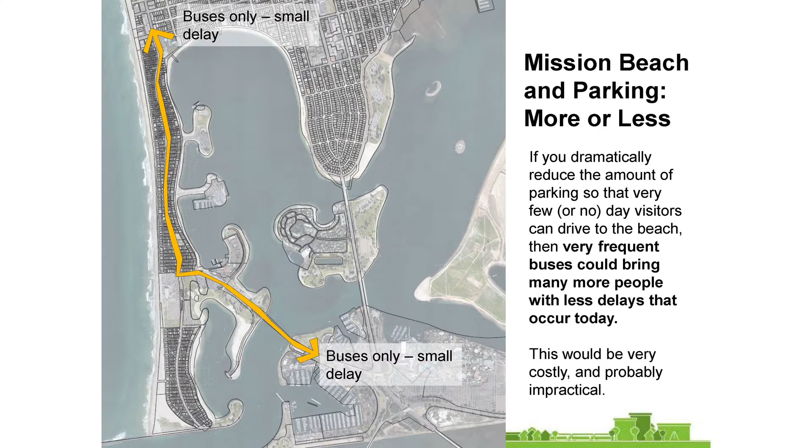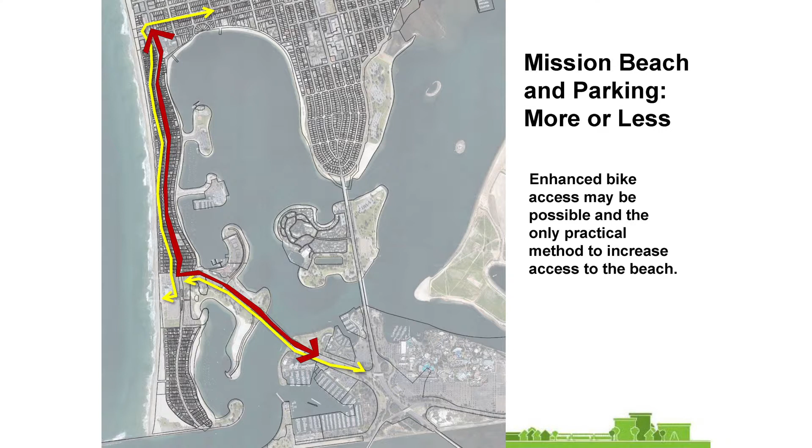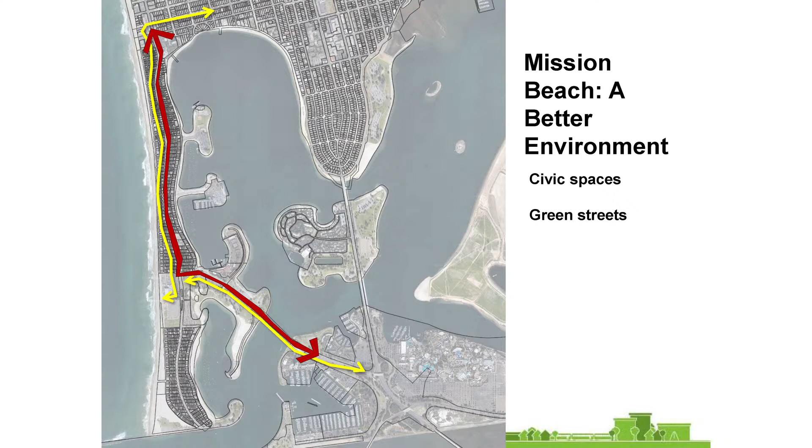So really, if you want more people in Mission Beach, it means squeezing more bicycles, pedestrians, and rollerbladers onto that beach. You've got one way in, one way out, and unless you radically widen or change it, it's not a transit place. It's very unusual to have a place like that, but that's what's been going on. So one thing we can talk about is having a better environment for the people who are there—not cramming more people on, not rearranging the parking, but having a better experience.

Now I'm going to talk about PB, and I have to say that until I came here, I thought PB was peanut butter. I'm never going to hear about a PB&J again without thinking of my visit with you all.

As we talk about PB, one interesting thing is that the relationship to the water is what's been driving so many people to come here ever since this place was created. Most of your street grid, the long blocks, are oriented towards the water. Down by the point, it actually turns, because that's where the water was—makes a lot of sense, since that's where the value is. If I were a real estate developer, I'd do it that way too.

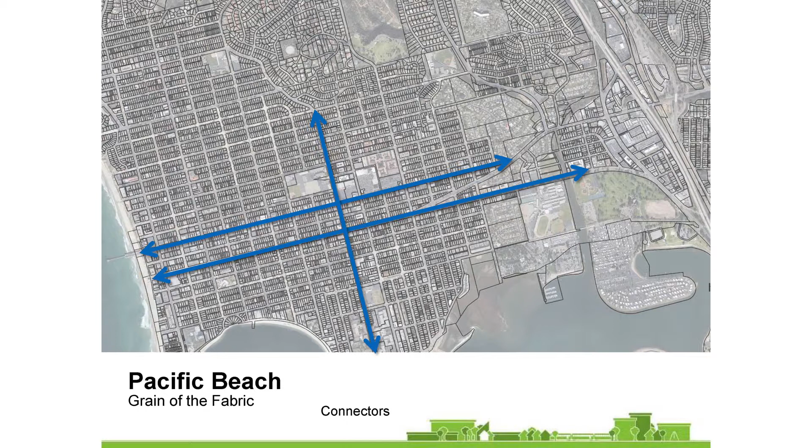Now, what's interesting is you've got to get to and from those blocks, so there's another fabric of streets that turn the other way. And then you've got the major feeder roads, whether that's Ingraham, Grand, or Garnet.

One of the things you've done is make those streets equivalent. Remember, we're talking about getting out of the cars, having a better quality of life in a pedestrian-oriented place. But the way you've treated your streets, north, south, east, and west, is almost the same, with stop signs and widths being the same.

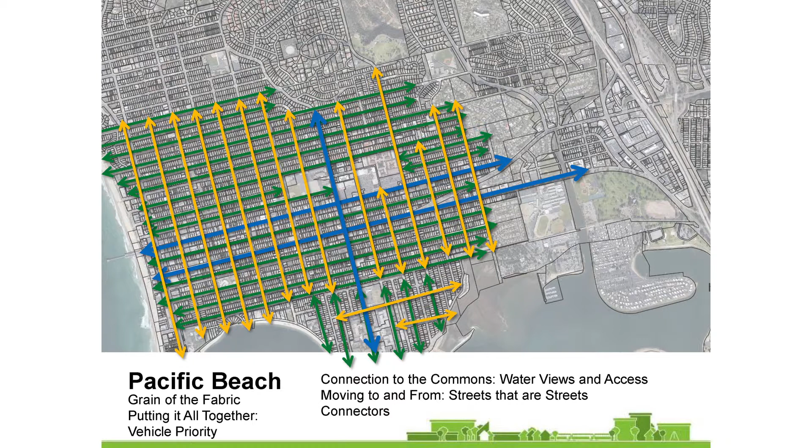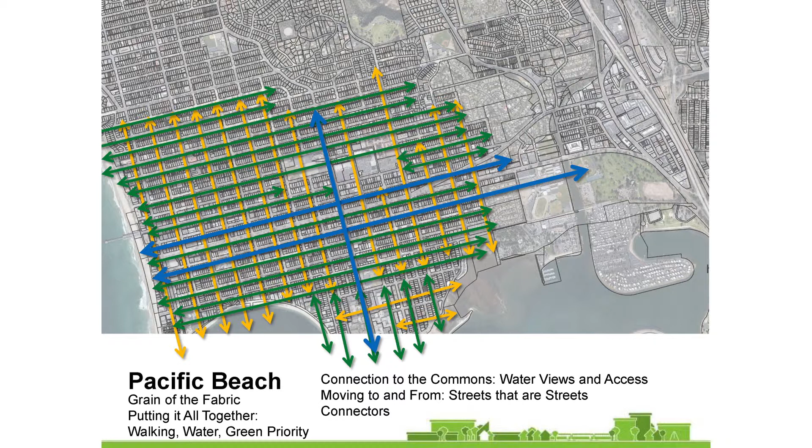You could think of it differently. You could say, let's make sure we can get to and from north-south, keep those roads clear, and put the stop signs the other direction. Or you could think of this as a place where you want to get to and from the water, giving priority to green routes and pedestrian connections.

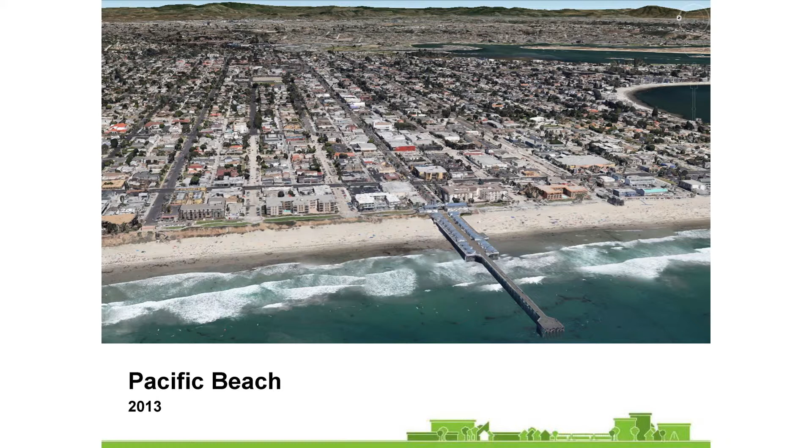As you look into the future, one opportunity you have is to think long-term, not just short-term. This place has changed fantastically every 50 years, and as we think about the future, it could and maybe will change, but you're in a position to manage that change.

As planners, we think a lot about walking and how far people will actually walk reasonably. It's about half a mile if you want to go to a restaurant, half a mile to an amenity like a beach, half a mile to walk to transit rather than taking your car.

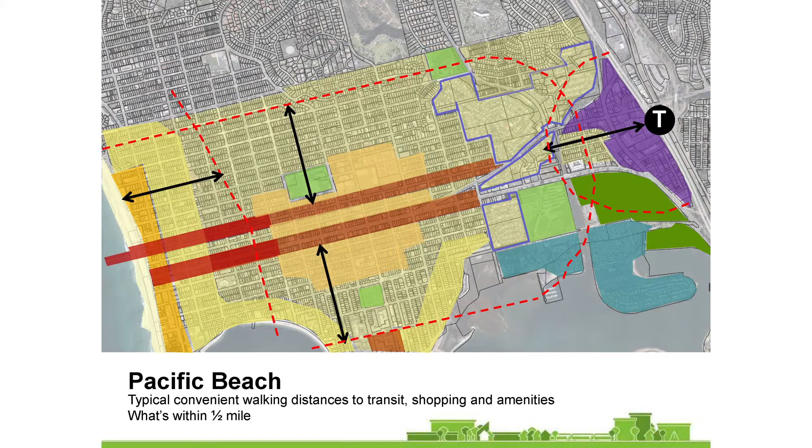So let's take that half-mile dimension and look at your community. The one line on the left is half a mile from the beach. A lot of this is away from the beach, but if you take half a mile from Grand and Garnet, that's almost the entire community. And if you add where transit's going to be and put a half mile there, you are an immensely walkable community - almost exactly the same size.

So how do we accomplish that? One thing we need to think about is the notion of where housing occurs and how it relates to those places. You've been changing from the bungalow world that was once here, when the real estate developers of 1914 and 1946 were thinking about the future. I don't think they envisioned quite the density of multifamily houses.

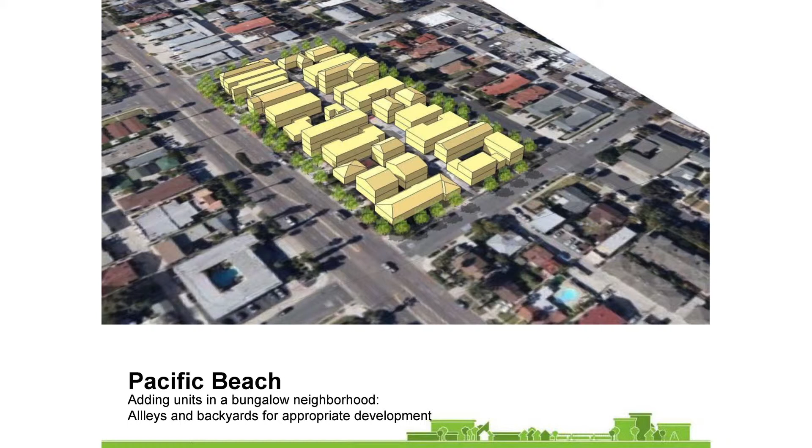If we look at how your blocks are organized in one of the more residential, single-family areas, you do have a mix of buildings quite close to one another that built up over time. One question you have to answer is how you want to work with zoning and the design standards or methods you could use about the future.

One thing you could think about is a pattern you already have - almost double units, where units are well-shaped but set back in the backyards. The backyards have been available, and with units along the alleyways, you can end up with a scale and character that is actually quite pleasant.

But another way to do it is to have really responsible, careful design multifamily buildings with courts and open spaces the community can enjoy as they walk by, bringing some of that landscaping and open space. So we think you have some important choices as things change and grow. Along the commercial areas, as Ed has pointed out, the amount of commercial use is actually not so strong, and you really do have some interesting choices.

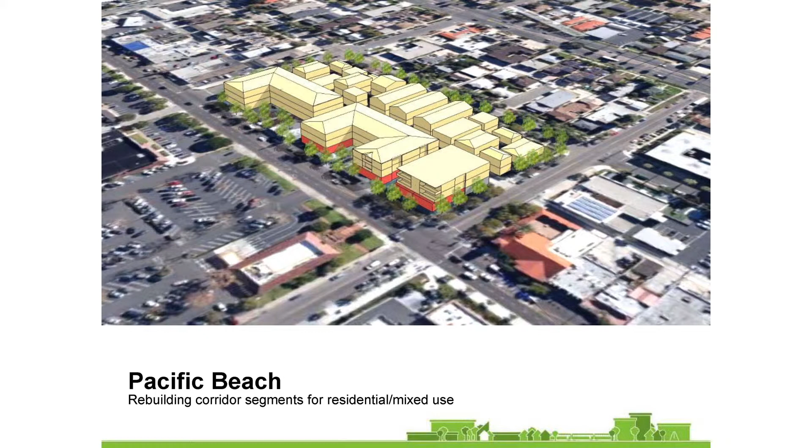One of the choices other communities have made when you have an underpass circumstance in busy roads is actually to structure an overpass. If you start thinking about an overpass and where that could occur, as you approach heading down towards San Diego from the north, an elegant span across the roadway can be a really interesting beacon and a symbol of how people can practically get to and from the rail station.

But one of the things we think you should think a lot about is how transit-oriented development could occur. If we take a look at the land next to the highway, that land has really been the back door of the community - storage units and parking storage for the car dealers that they bring forward. But a transit station really can change that.

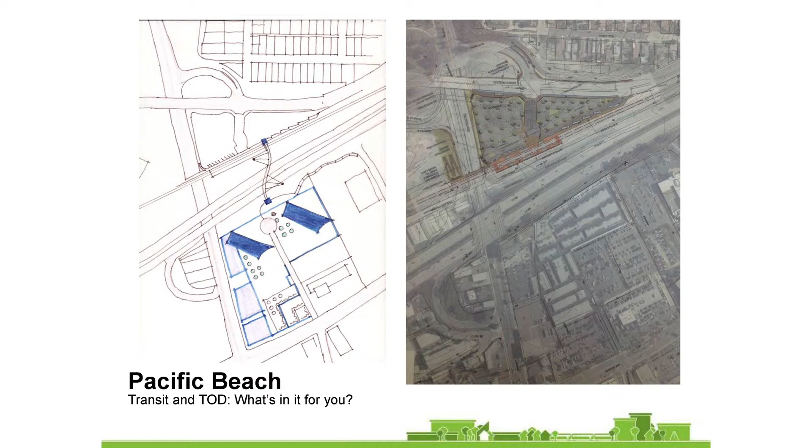And if you can imagine taking advantage of the grades there, building up some platforms with parking below and buildings on top, linked to a bridge and peering over their neighbors down towards Mission Bay, you start to think, holy smokes, this could be a great address - a better place to go to work rather than commuting a long way away. People could actually come to PB and not just take the transit away from PB.

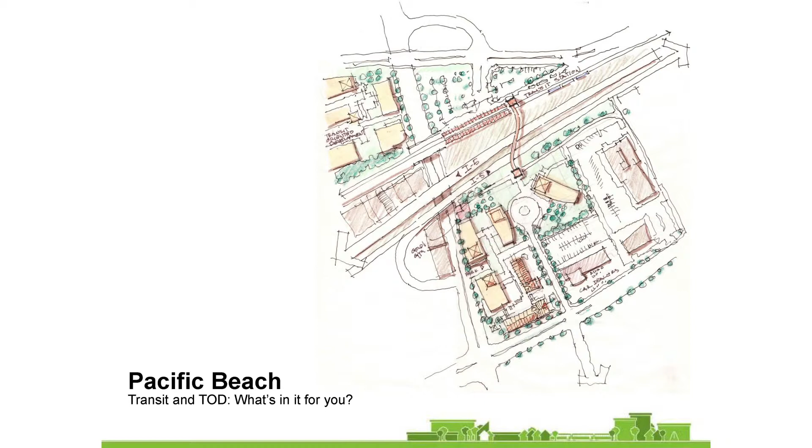So we put all of this together and thought about what the daily experience of a person who lived here might have in the future, with some of the improvements we're going to talk about. We're going to have a person, and we'll end up at their house on Missouri. But we've got to come up - we're going to come up from downtown. We're going to arrive, and here we are on what you can only think of as a wide boulevard.